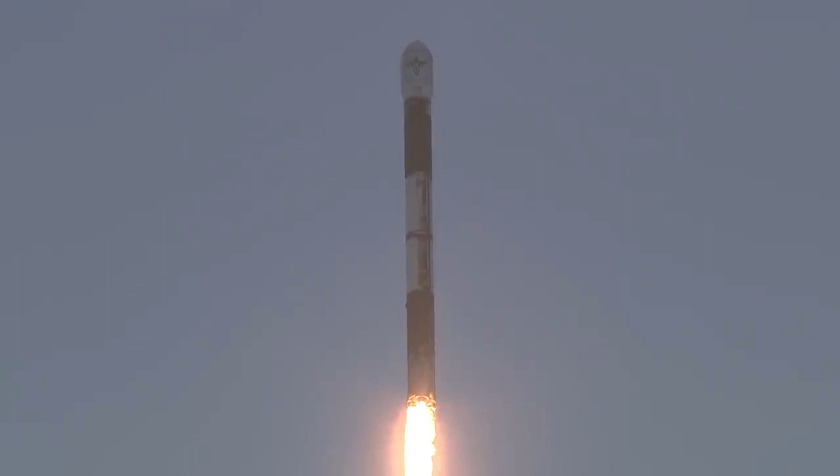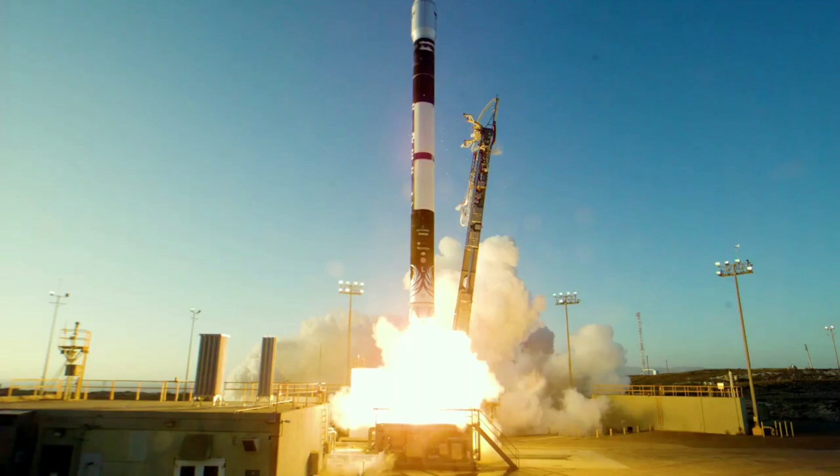Reaching orbit for the first time is an immensely difficult task that few companies and agencies around the world have successfully completed. Firefly Aerospace is a company working towards this ambitious goal using the Alpha launch vehicle. While the first attempt just over a year ago was unsuccessful and ended with an explosion, the company is confident this time around, applying what they learned the first time.

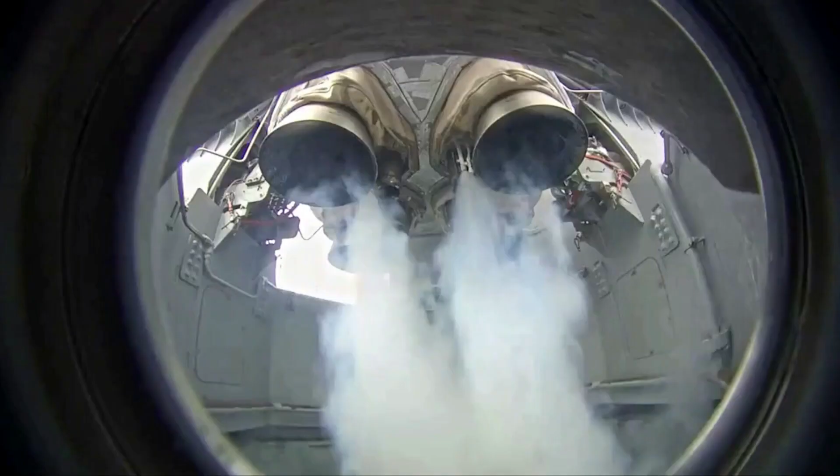Over the last 2 days, Firefly Aerospace had launch opportunities for the small lift launch vehicle. This included a 4-hour launch window on the 11th and 12th. Unfortunately, on both days, the launch was scrubbed due to various reasons, including weather and a slight propellant complication. This being said, the company has already announced the next launch opportunities and are continuing to work towards reaching orbit.

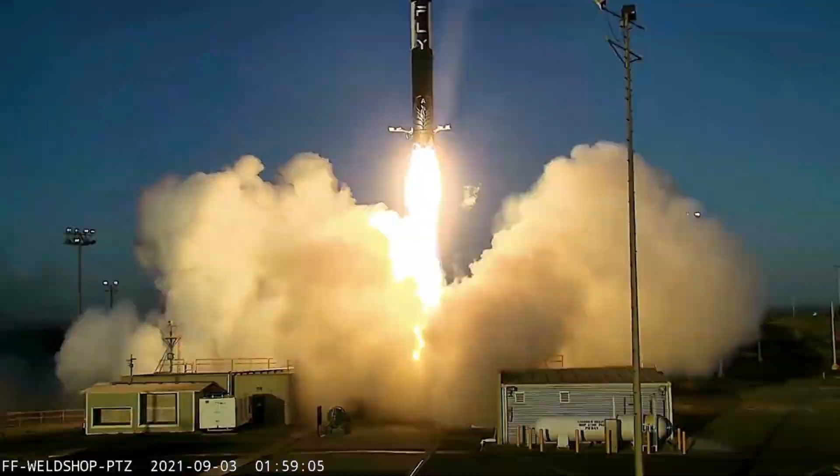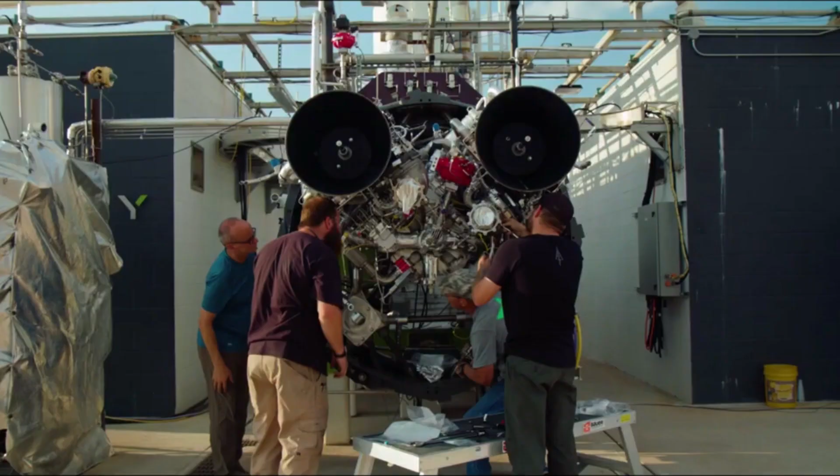As Alpha continues to get closer towards its biggest milestone yet, the rocket highlights a vast amount of opportunities and future depending on this mission. A challenge that could have a very big impact on not only the future of this launch vehicle, but also Firefly Aerospace as a company. Here I will go more in depth into the previous 2 days' attempts, upcoming launch dates, a closer look at the Alpha launch vehicle, and more.

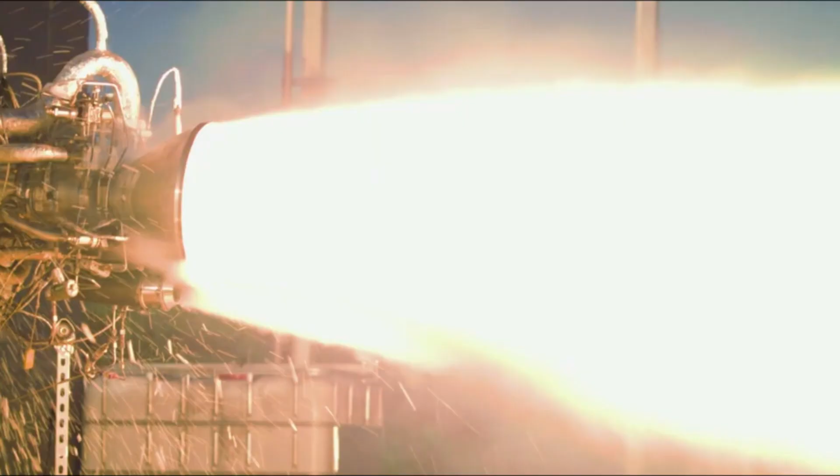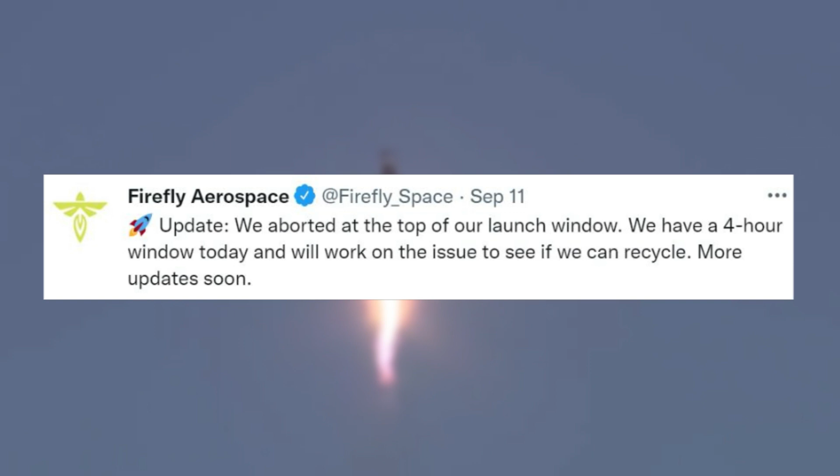The last few days have been very eventful for Firefly Aerospace as they prepared and got close to the second launch of Alpha multiple times. The updates began on September 11th, which was the first official launch opportunity for Alpha. Not long ago, at the start of the launch period, Firefly Aerospace tweeted saying, "Update. We aborted at the top of our launch window. We have a 4-hour window today and will work on the issue to see if we can recycle. More updates soon." Thanks to the longer launch window, Firefly had another opportunity later in the day.

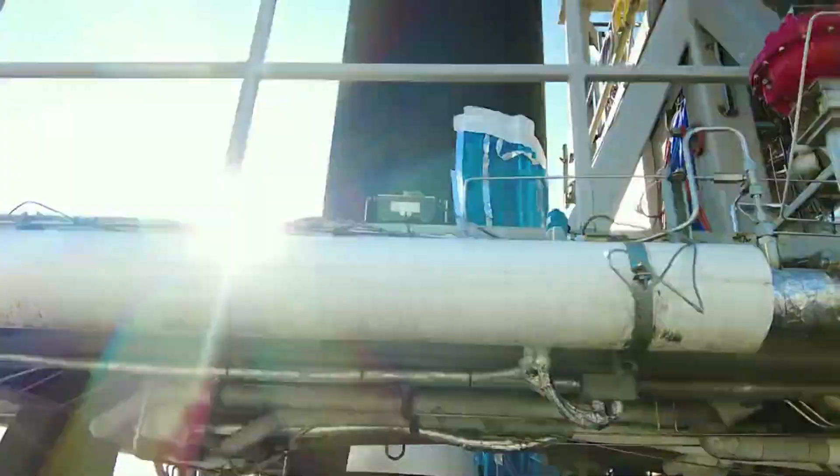However, the launch was eventually scrubbed for the entire day. They tweeted again mentioning, "Our launch today was scrubbed due to a drop in helium pressure. The Firefly team is on it and will use our launch window tomorrow, which opens at 3 p.m. PDT." In terms of the drop in helium pressure, it looked as if it was only a small complication as the company was confident it would be fixed within a day.

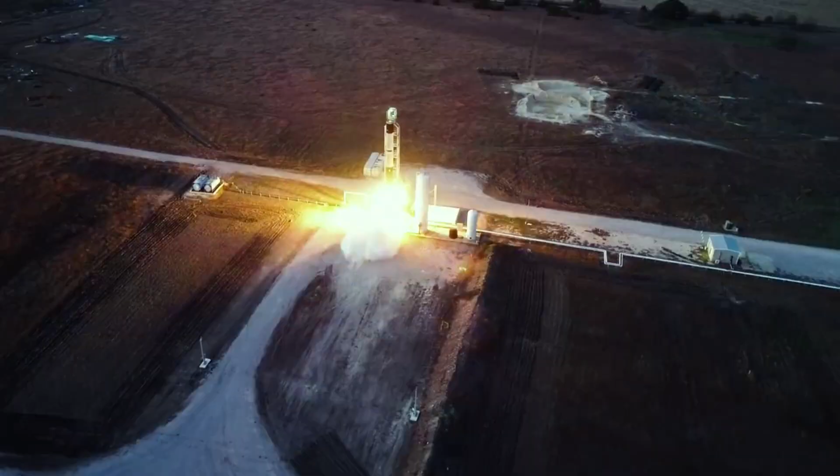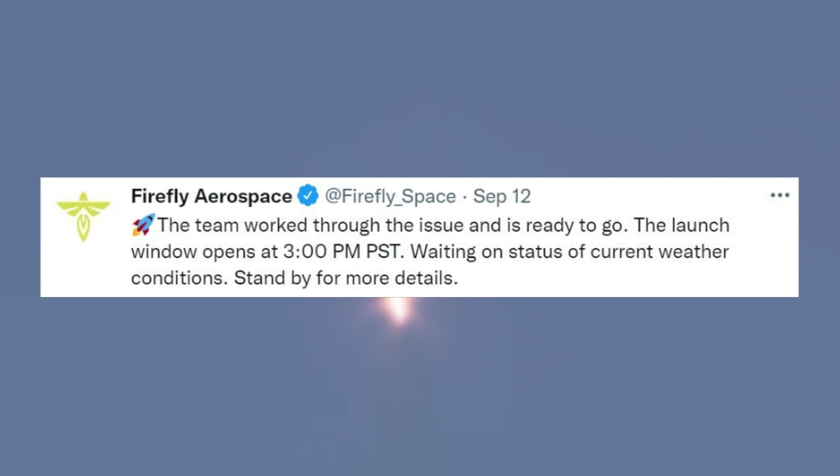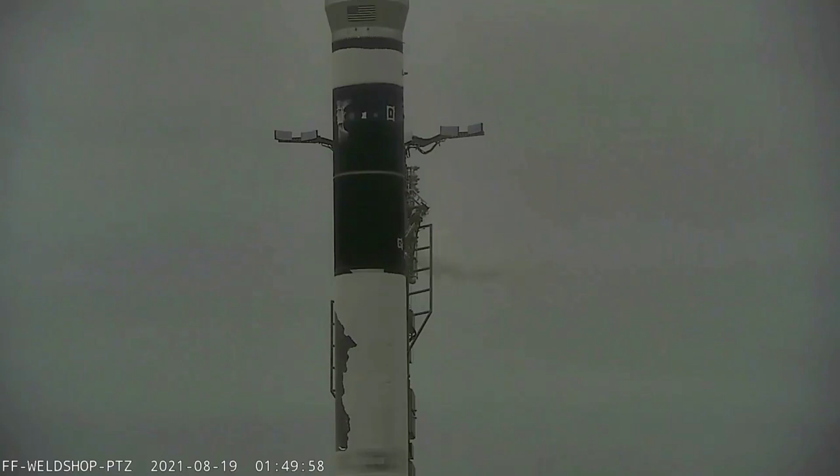Firefly confirmed this not long after on the 12th with a tweet pointing out, "The team worked through the issue and is ready to go. The launch window opens at 3 p.m. PST. Waiting on status of current weather conditions. Stand by for more details." While the first attempts on the 11th hadn't worked out for various reasons, Firefly was prepared for success yesterday on the 12th. Unfortunately, something that was out of Firefly Aerospace's control ended up cutting the Day 2 launch attempt short.

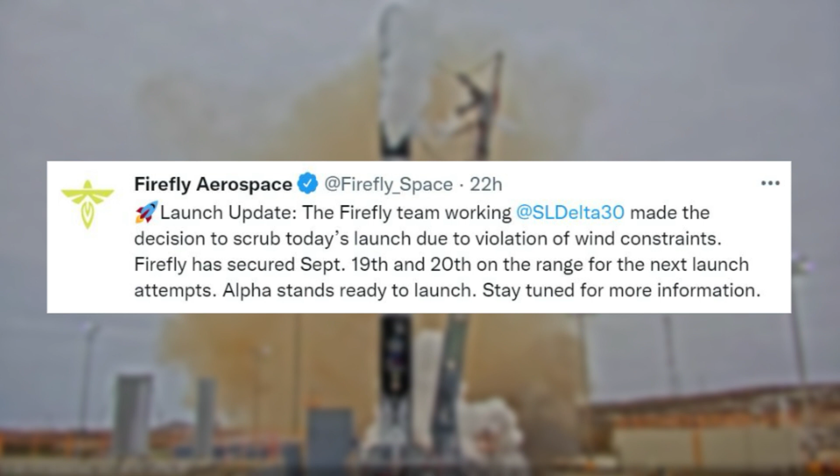The company tweeted one last time saying, "Launch update. The Firefly team working at SL Delta 30 made the decision to scrub today's launch due to violation of wind constraints. Firefly has secured September 19th and 20th on the range for the next launch attempts. Alpha stands ready to launch. Stay tuned for more information."

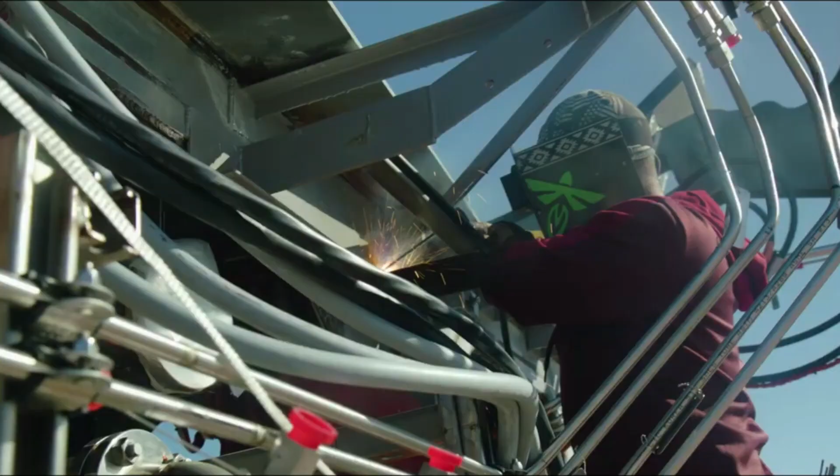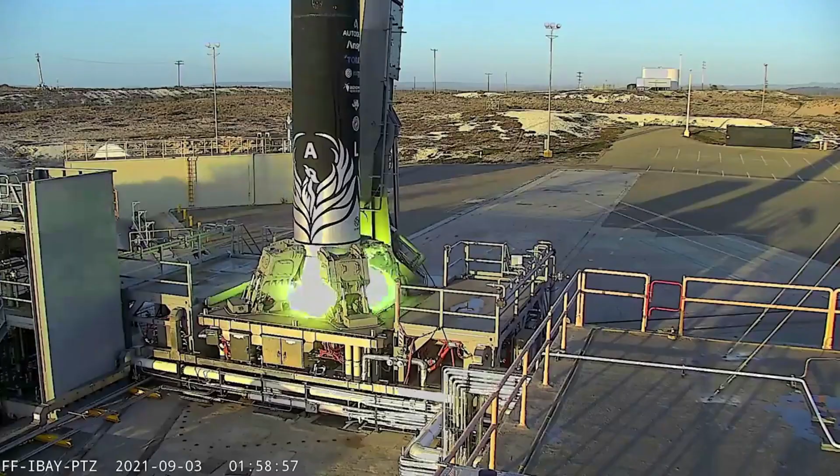The launch site where all this is happening is SLC-2 at Vandenberg Space Force Base. Located in California, Firefly intends to conduct polar and SSO launches to high inclinations from this launch site. Specifically, it can support launches from 58 to 144 degrees of inclination. This is also the same site as Firefly's first attempt just over a year ago. While the weather got in the way this time around, the upcoming launch opportunities on the 19th and 20th give plenty of time for a second launch.

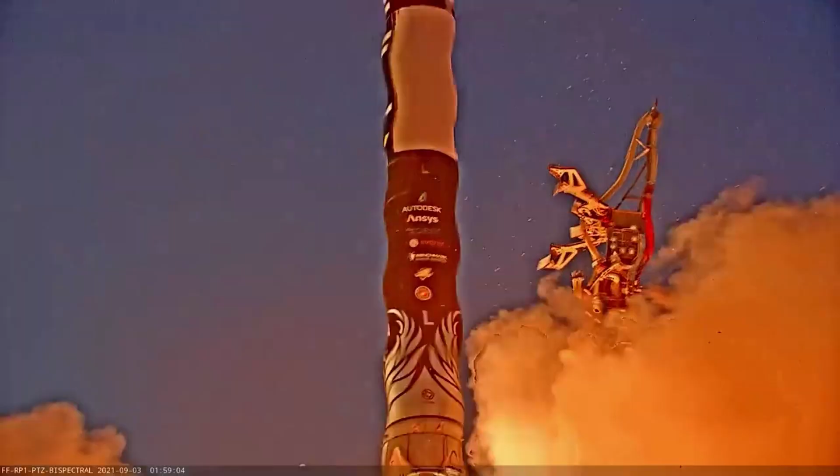It's clear that Firefly is taking its time and working to ensure everything is perfect before Alpha takes off. This attention to detail could help ensure a successful second launch attempt, which is very important for the company. On Alpha's first launch attempt last year, during the 2 minutes and 25 seconds of flight, Firefly obtained a substantial amount of flight data that has been applied to the current rocket sitting on the pad. Ideally, right around a week from now, we will see this work and dedication pay off.

Now that we know more about the recent launch attempts and what caused them to scrub, we can take a closer look at what makes the Alpha launch vehicle special. With it expected to launch not long from now, it helps to know exactly what Firefly's goal and plan is

for the rocket. Alpha is a small lift launch vehicle with a payload capacity to low Earth orbit of 1,170 kilograms. The upcoming launch is named To the Black, and is officially Firefly's second technology demonstration flight that will attempt to launch multiple satellites to LEO.

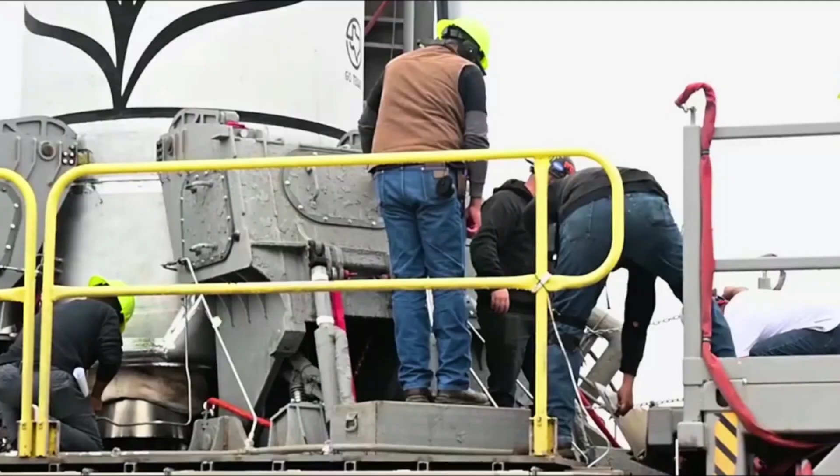In terms of the mission profile, Alpha will first insert into an elliptical transfer orbit, coast to apogee, and perform a circularization burn. Firefly points out that Alpha offers the highest payload capacity for the lowest cost per kilogram in its vehicle class. In addition, using tried and true, flight-proven rocket technologies, Alpha is 100% manufactured in the USA and designed to be the most reliable small satellite launcher available.

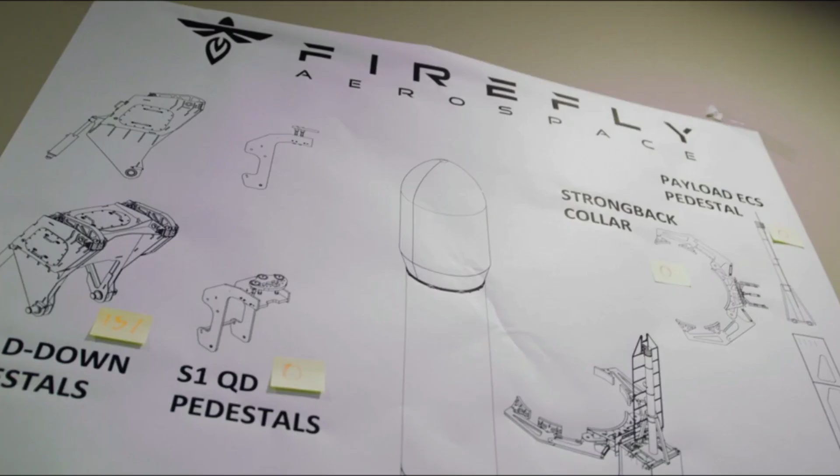Alpha's pump-fed engines use standard LOX/RP, and its avionics system, such as the flight computer and communication system, employ COTS components with established flight heritage. In terms of the rocket structure, modern advances in carbon composite materials are used to create strong, lightweight primary structures such as propellant tanks, all of which helps Firefly make high-quality components at a reasonable price.

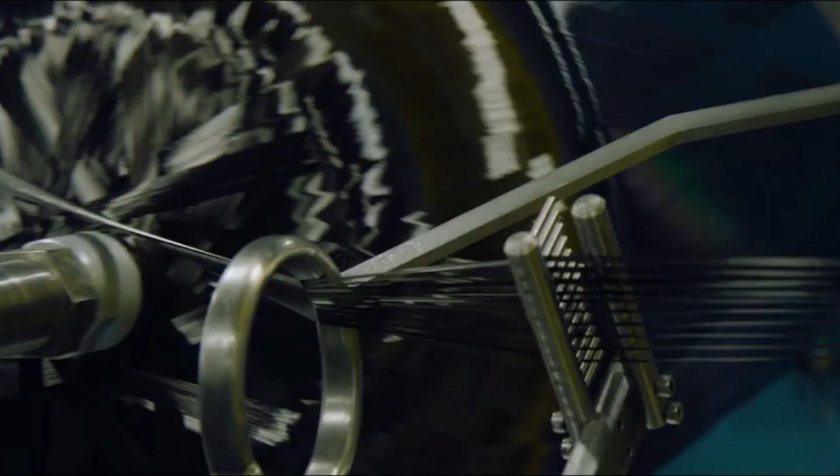One interesting aspect of this launch vehicle that improves what it's capable of is named the SUV, or Space Utility Vehicle. While this is not being used on this initial demonstration flight, it's expected to play a very valuable role in Alpha's future missions. Many people are familiar with Rocket Lab's Electron kick stage and Photon spacecraft. Firefly's SUV is very similar.

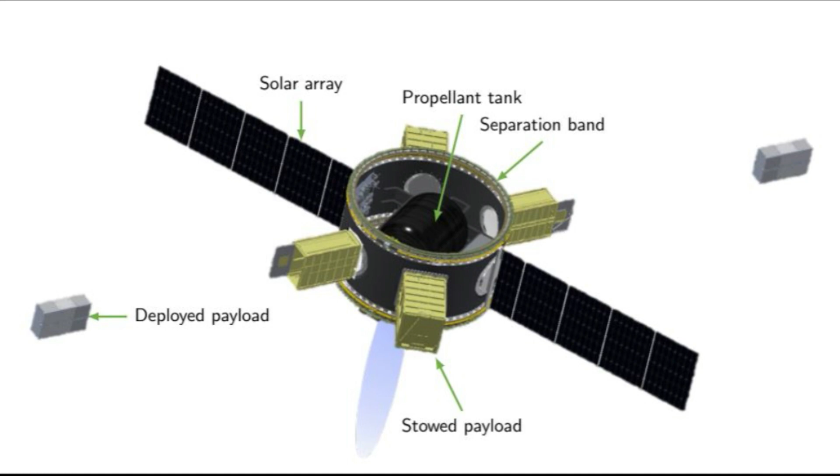The space utility vehicle opens up orbits never before accessible with a small launch vehicle alone. When paired with Alpha, SUV can carry multiple payloads well out of LEO to distances as far as the Moon. Providing propulsion, uplink and downlink services, and up to 2 kilowatts of solar power, SUV is capable of satisfying a wide variety of mission architectures lasting up to 5 years.

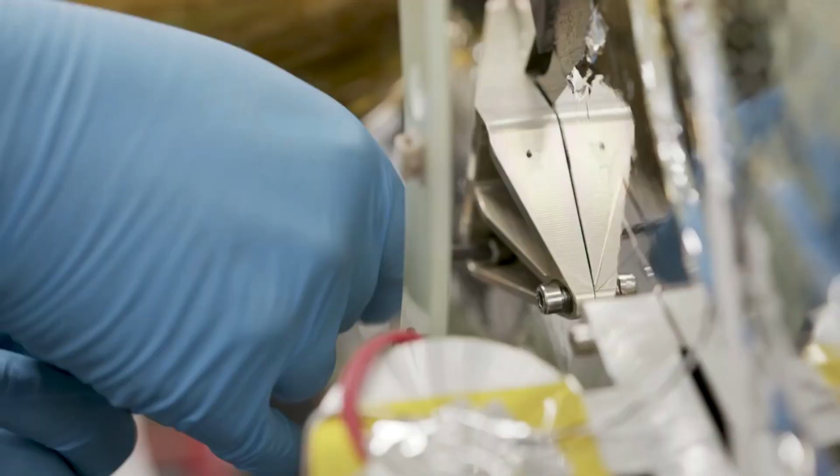Recently, we have seen Rocket Lab have some major success with its third stage equipment, and Firefly could as well depending on the success and future of Alpha. One feature of the Alpha launch vehicle that stands out is its propulsion. The first stage is powered by 4 Reaver engines, and the second stage uses a single Lightning engine.

It's important to point out that one of the first stage engines losing thrust was the reason for Alpha's first unsuccessful launch attempt last year. Specifically, an initial review of the flight data indicated that an electrical issue caused the shutdown of one of the 4 first stage Reaver engines. This eventually led to the termination of the launch vehicle in flight.

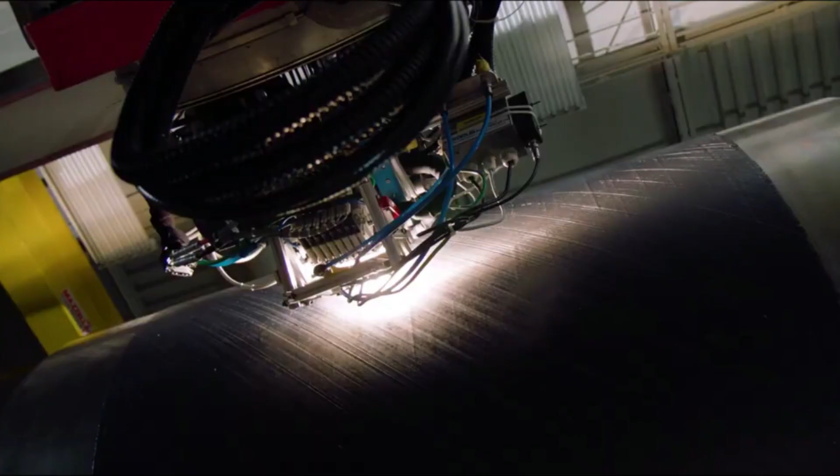On Alpha, both stages use common designs: copper regen-cooled LOX/RP-1 thrust chambers, a simple tap-off cycle which drives single-shaft turbopumps, nozzle-mounted turbine exhaust manifolds, and hydraulic actuators. Innovations in Firefly engines include its simple crossfire injector, tap-off geometry, dual-mounted electrically actuated trimmable propellant main valves, and ultra-compact horizontal turbopump mounting. The upper stage engine, Lightning, includes a turbine exhaust-cooled refractory metal high-area ratio nozzle extension.

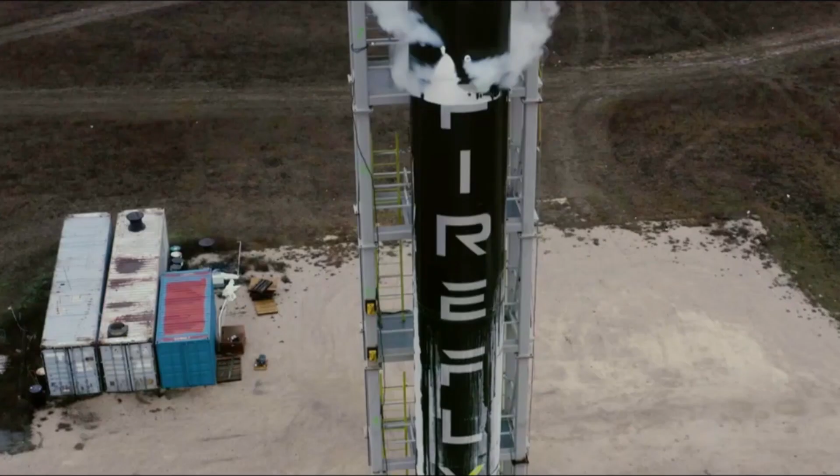The first stage Reaver engines feature simple single-axis gimbaling. Consistent with the overall Alpha vehicle design, cost and performance are traded and optimized in Lightning and Reaver components to provide the best payload performance value.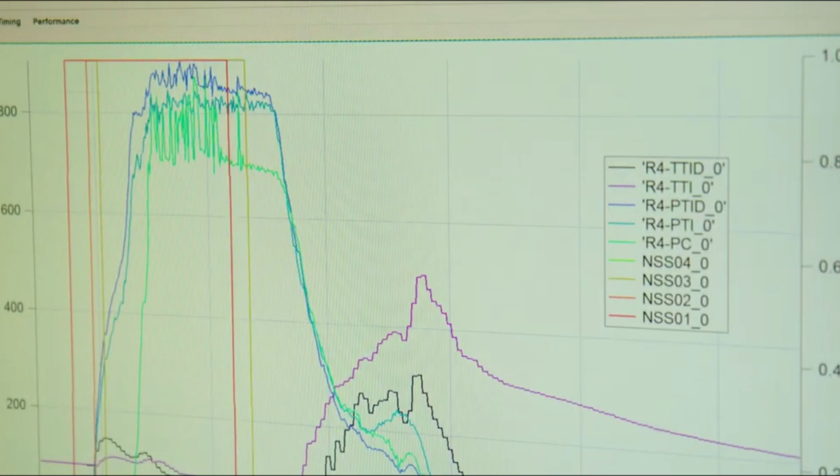Firefly was originally founded to provide economical and reliable access to space through the design, manufacture, and operation of launch vehicles and spacecraft. In order to reduce risk and increase reliability, Firefly employs a vertically integrated manufacturing process while leveraging high-maturity COTS components. They are confident the technologies employed in the flagship Alpha vehicle provide a clear pathway for future incremental improvements in capability and expansion of the Firefly Beta launch vehicle.

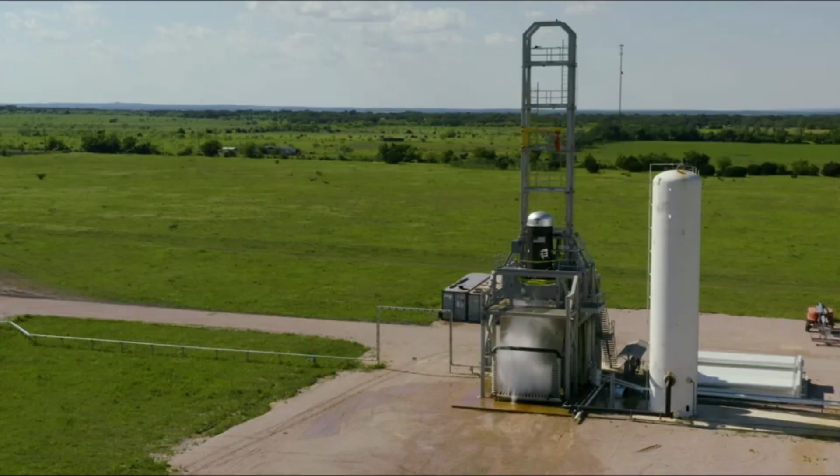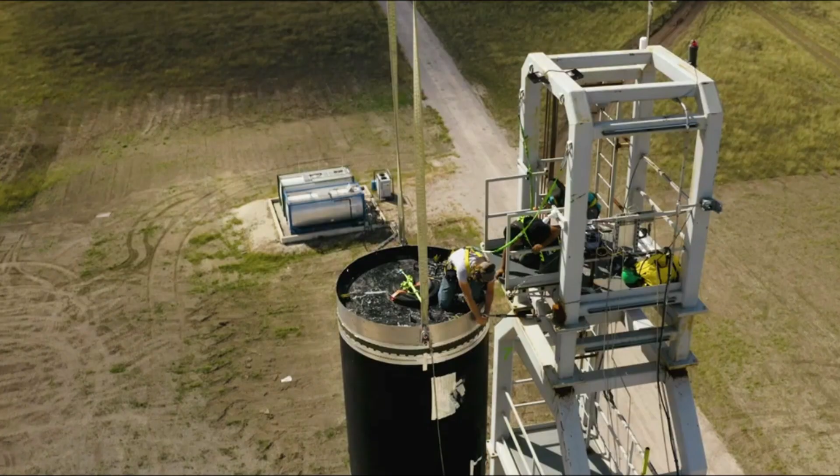What's so exciting about Firefly Aerospace is its plans for the future. Alpha is just the beginning as they work towards even bigger and more ambitious plans in the future. This not only includes a bigger rocket named Beta, but space planes and so much more. However, before any of this, the company needs to get Alpha up and running on a consistent basis. The first step includes a successful launch in a week from now, marking the first time they reach orbit.

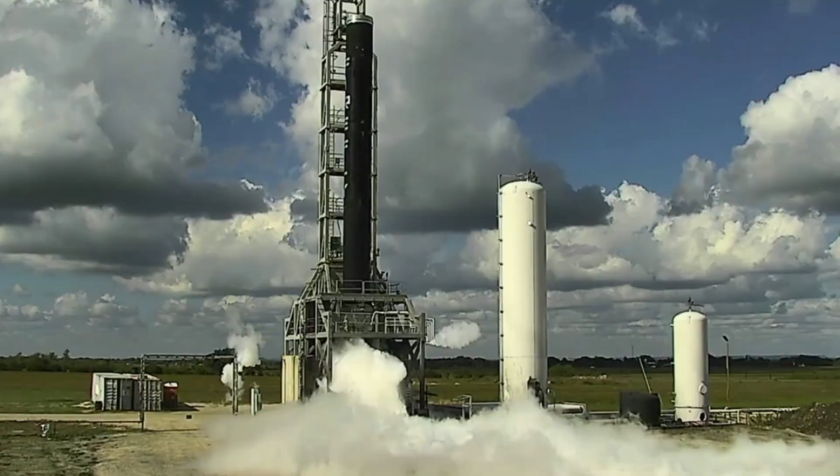Firefly Aerospace has been working hard to reach orbit for the first time using its Alpha launch vehicle. In September of 2021, the company had its first launch attempt which showed promising results but was unsuccessful in the grand scheme of things. While the launch attempts in the previous 2 days were scrubbed, the company has already scheduled the next launch dates only days away. We will have to wait and see how it progresses and the impact it has on the space industry.